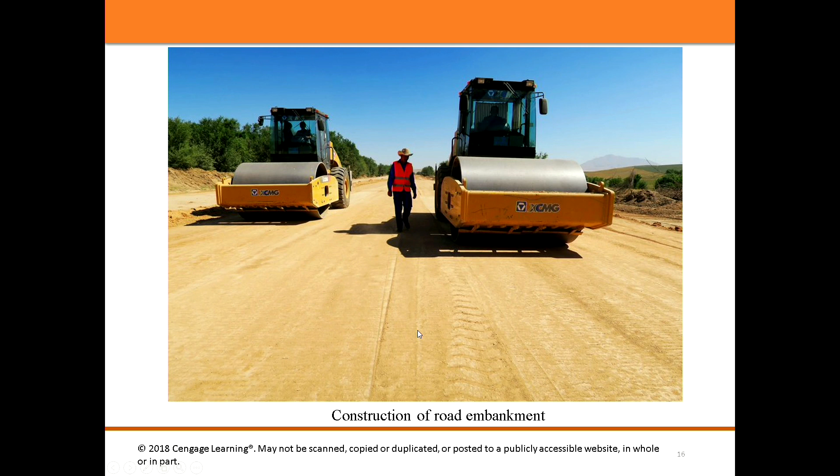And also construction of foundation ditch. So if you want to build a whole building, to process the foundation soil, we need to make a foundation to hold the building. Pile foundation is the most common foundation we use, especially in soft ground, in the Wenzhou district or in Shanghai. Those places are all near the sea, and the ground soil is very soft. Pile foundation can reach very deep ground and strengthen the foundation. So this is a foundation ditch.

Those are piles. So you need to understand the soil property here, how many piles, how dense the piles are, and what the distance between those piles should be designed. Those are all related to soil mechanics. Okay, so first you need to understand the ground you process. The ground is about soil.

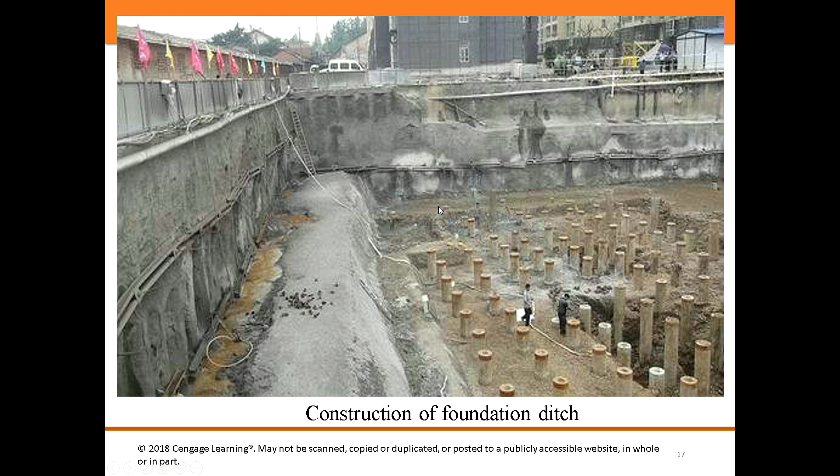And then let's look at the development of soil mechanics. We go through this part very quickly. The development of soil mechanics has 4 phases. The first is pre-classical, then classical soil mechanics phase 1 and phase 2, and then modern soil mechanics, the latest 100 years.

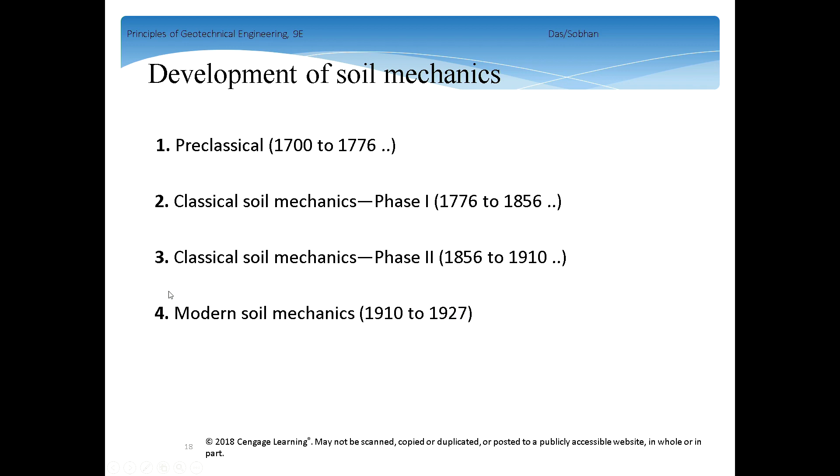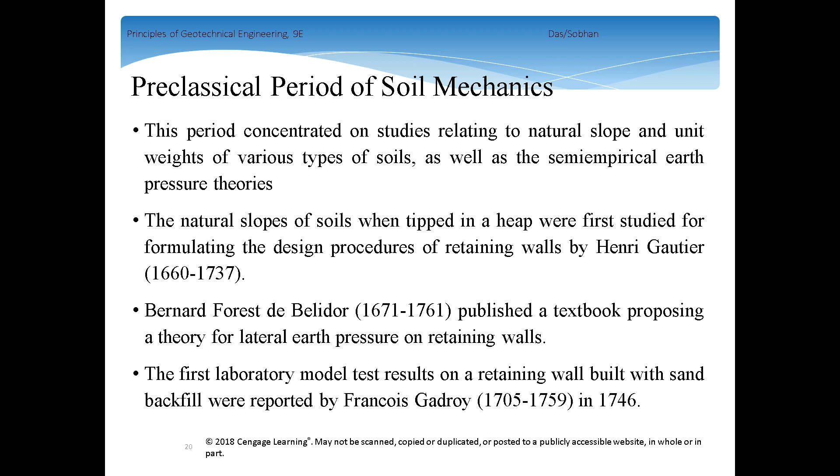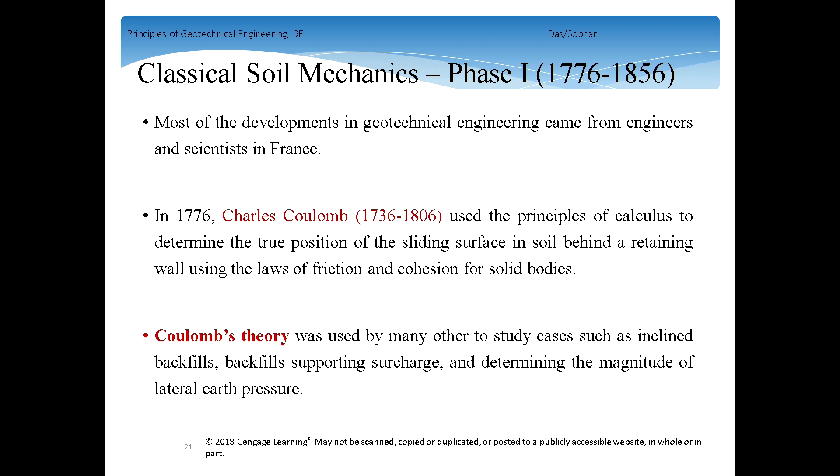And in classical soil mechanics, the first phase, we have Coulomb. Coulomb is a very big scientist in soil mechanics. Later we will learn Coulomb theory, Coulomb shear strength, in the shear strength part of soil mechanics. He used the principle of calculus to determine the true position of the slide surface, then to analyze the stability of slope and the retaining wall, using the law of friction and cohesion for solid bodies. Up to now, we still use friction and cohesion to analyze the shear strength of soil. Coulomb theory was used by many others to study cases such as inclined backfills and determine the magnitude of lateral earth pressure. This is Coulomb.

And in phase 2 of classical soil mechanics, people started to learn the coefficient of permeability. And this guy is also a very big scientist. He developed the theory of stress distribution, because before you learn settlement and the shear strength of soil, you need to know the stress, right? In soil mechanics, to calculate shear failure, you need to know the stress, shear stress, the minor stress, the major stress, the net stress, those stuff. So stress distribution is the first step to analyze this problem. He developed the theory of stress distribution under loaded areas in homogeneous, semi-infinite, elastic, and isotropic media. We will learn this in chapter 10.

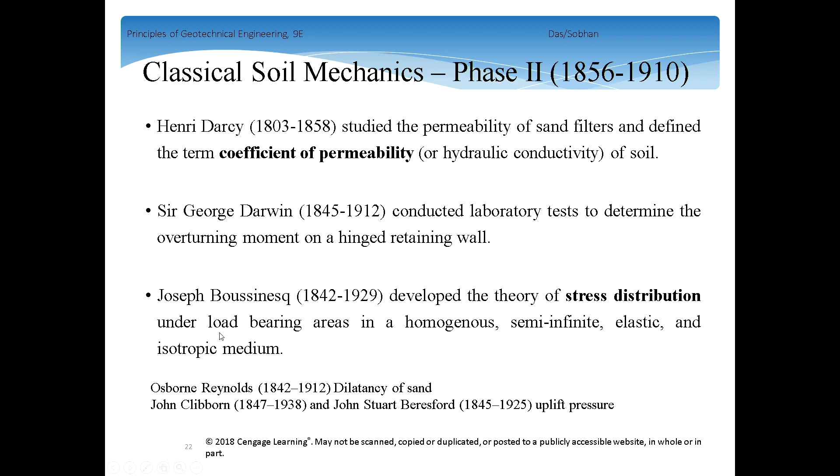And Atterberg defines the clay size fraction as a percentage by weight of particles smaller than 2 microns in size. And later, this guy defines the plastic limit and liquid limit for soil. Liquid limit and plastic limit are the two main properties to define soil. Whether the soil is a clay or sand or silt, in most cases it depends on the plasticity of soil, that is, liquid limit and plastic limit.

And finally, we go to Terzaghi. Terzaghi developed the theory of consolidation for clay as we know today. So now we still use the theory of consolidation. The theory of consolidation is developed from the saturated soil to calculate the settlement of foundations. And after the consolidation theory of Terzaghi, people developed it to unsaturated soil. But all of the theory is based on Terzaghi's consolidation theory.

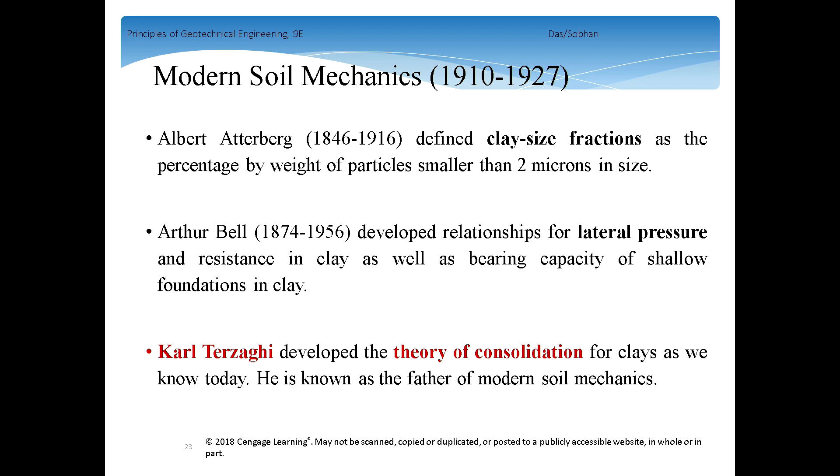So he is also known as the father of modern soil mechanics. He is a very, very big scientist in soil mechanics. This is Terzaghi. He's already died.

Oh, what a shame? You can't see me.

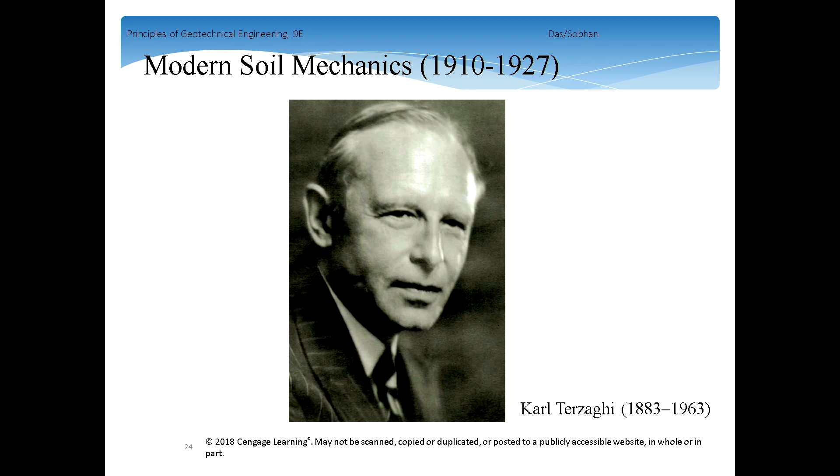Geotechnical engineering after 1927. So people already recognized soil mechanics and knew that it is a very important science branch. So they started to hold conferences to discuss engineering problems together. So up to now, as long as you study for a master's, you will notice that every year there are a lot of conferences, something like symposiums, everywhere all over the world to talk about geotechnical problems, the development of civil engineering, a lot of things.

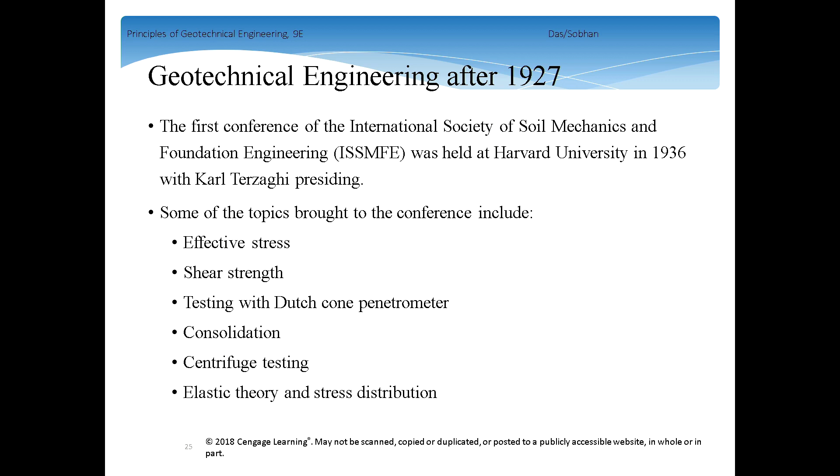And by the early 1950s, computer-aided finite difference and finite element solutions were applied to various types of geotechnical engineering problems. So actually now, not only for master's students, but also for many other research doctors or professors, some of the professors never even stayed in the experiment laboratory, but they still study civil engineering, geotechnical engineering, only based on computers.

Because now you know that we can model. For example, I can build a model for this building and analyze its stability under different loads. For example, I give a very huge wind load, because in Wenzhou sometimes we have heavy wind, right? Or the earthquake, whether it is still stable, we can check this, right? But to check this, those things, for example, the structural frame or the foundation, follow different theories.

Those doctors, those professors who start with computers, they try to model the soil or the structural stability more reliably. They build those equations, they build this theory into computer code and make the analysis more reliable. This is what they do. But another part is the laboratory stuff.

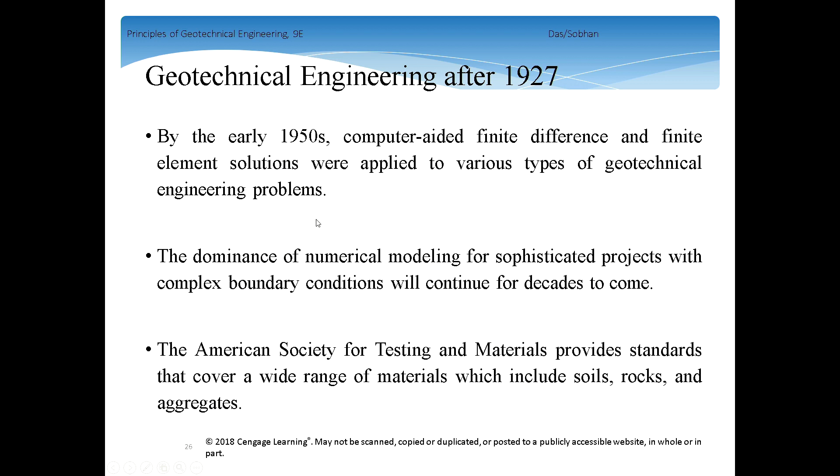And then there are some other developments in geotechnical engineering. And we say the end of the era is the last of the early giants, Professor Peck. Peck is a guy who analyzed the settlement of the soil above a tunnel. And he passed away in 2008 at the age of 95.

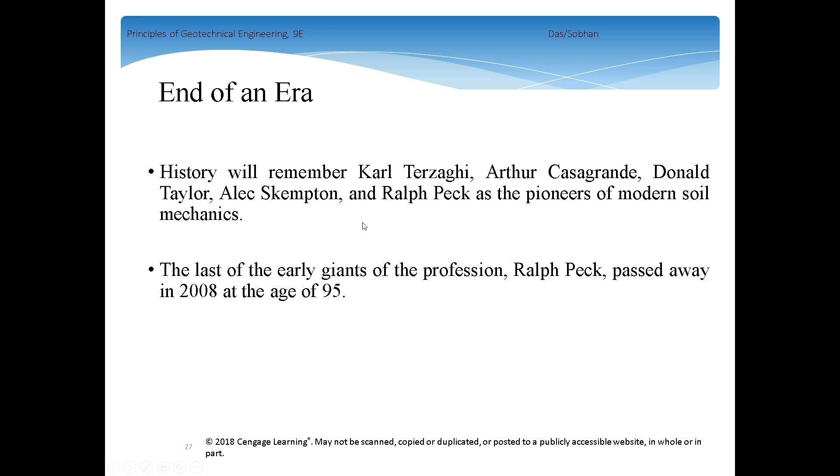Wow. So after that, we say that this is the end of the era, because Peck is a person from the same period as Terzaghi. So after him, we think that all the previous scientists are all dead, and we need to start a new page, something like this. That's the end of the era. And this is the development of soil mechanics.

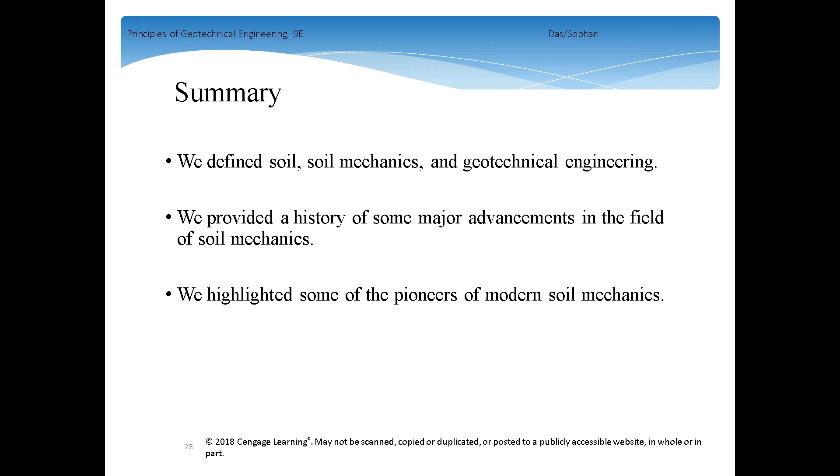Actually, you see that soil mechanics is a new science branch, much newer than chemistry, physics, materials, metals, all those things, right? So we gave a quick brief of the first chapter.

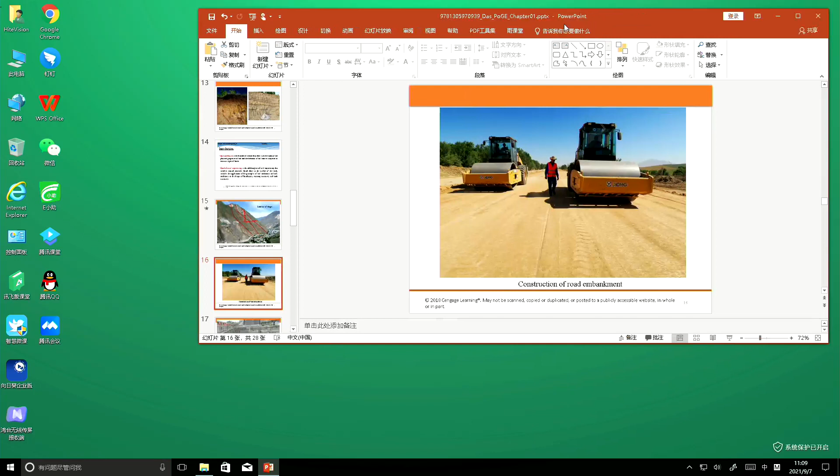And from the second chapter, we start to learn the physical properties of soil. And in the second chapter, at the very beginning, let's see where soil comes from, the origin of the soil and grain size. Origin of the soil, you just need to know where it comes from. Yes, it comes from rock. And then grain size distribution is